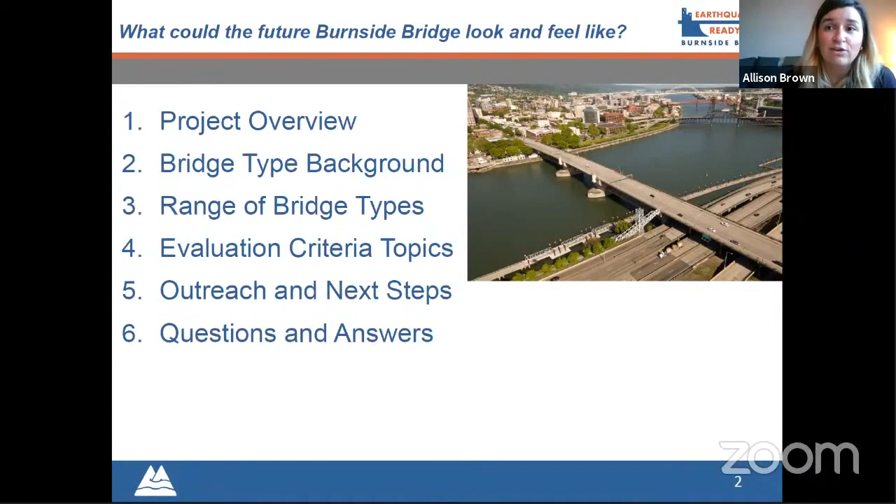We'll also let you know what additional outreach is happening and some of the next steps and how you can continue to stay involved and informed. Then we'll get into your questions and answers. This presentation should take about 30 minutes, and we're going to save the second half of the meeting for your questions and answers. But I think we can go to the next slide.

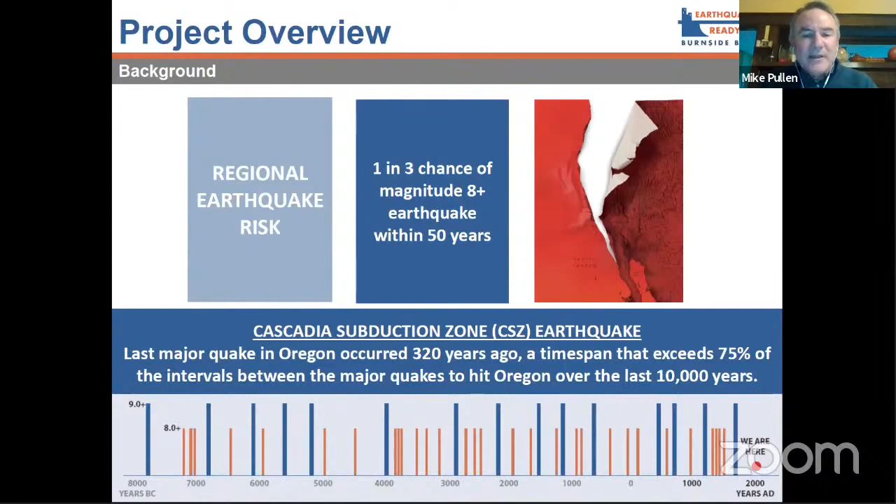So why are we doing this project? Engineers tell us that if the big one were to happen today, none of our downtown bridges in Portland would be usable for at least a month. And in the case of some of the bridges, we'd have to completely rebuild them. So that would really devastate the community in the immediate time after the earthquake and really harm its ability to recover. So the purpose of the project is to make sure we have at least one bridge we can count on the day of the big earthquake. And then after that day, we want to have at least one bridge that we can use to recover as a region.

Here I oftentimes mention the example of New Orleans. After Hurricane Katrina, they lost about a third of their population, about a third of their jobs. And I think 15 or 20 years later, they're still underneath the population when Katrina struck. So we want to have infrastructure that can help our region recover and hold our economy and our jobs here.

Then the last point on the slide is, if we're lucky and maybe the earthquake doesn't happen in the next 100 years, well, that doesn't change the fact that the Burnside Bridge today is 94 years old. We're not going to get another 100 years out of that bridge. Multnomah County is interested in making sure that whenever the earthquake happens, we've got a bridge that will serve us another 100 years. And we want a bridge that works well for all modes. The current bridge doesn't work well for all modes. Next slide, please.

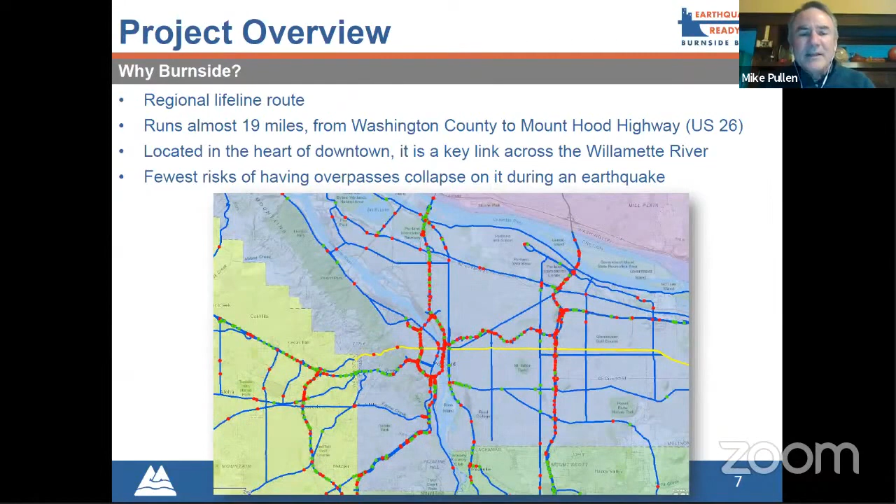Meanwhile, we want to make sure downtown and the east side are connected, so we've chosen Burnside. Next slide, please. So we're in a long project.

I was talking to a journalist today about how long these projects take, and it is true. There's a lot of requirements. When you build something new, you have to go through additional planning and federal review of your plans.

So we are marching from left to right across this slide of our schedule. We've done a feasibility study that looked at every single option you could think of, even tunnels. From that, we ended up with 4 of the best options to do a deeper level of study on. We're in that phase. We've identified a preferred alternative.

We're going to show that to you tonight if you're not familiar with it. And by the end of this year, the end of 2021, we expect to have our plan approved, including the preferred alternative. Then next year, we can begin the work to design it and acquire right of way. That's about a 2.5-year process. So we could be about 3.5 years away from constructing the bridge.

Fortunately, we have the money to get through all this design phase, and some of the money for construction, and we're looking for the additional construction funds from state and federal sources.

One thing before we leave this slide is that there have been some changes in the federal approval process, and one of those changes requires us to actually identify the bridge structure type this year. In the past, you might have been able to wait until after you got your plan approved, but there's new requirements, and that's why we're talking today about what structure type. So we hope to make that decision by July of this year.

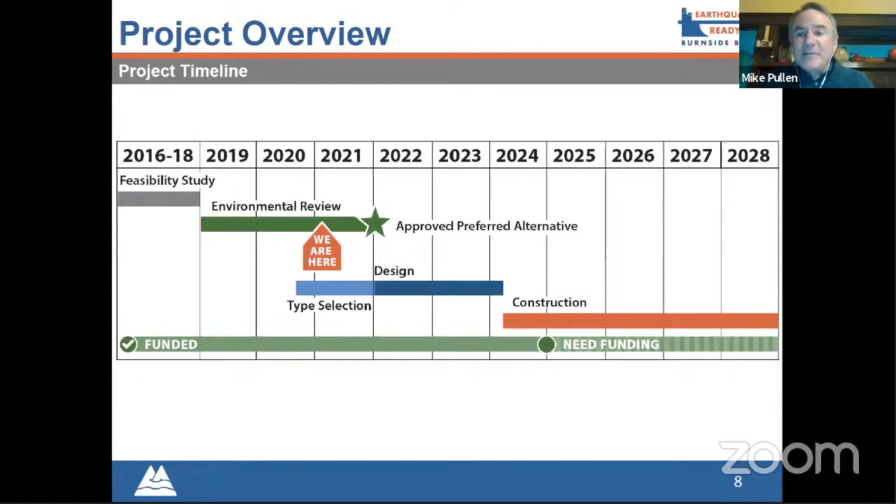Next slide, please. So this slide kind of zooms in on the immediate milestones for us. When it comes to the bridge type, tonight we're going to share with you the ones that we've identified as a small range that kind of are feasible and make sense for being considered in more depth. And we'll be coming out with a recommendation of the preferred bridge type later this spring.

We have a community task force that gets deep into the details of these decisions and makes recommendations. So they're expected to make a recommendation, I think in May, and we'll go out to the public with that recommendation and then look to finalize it in July.

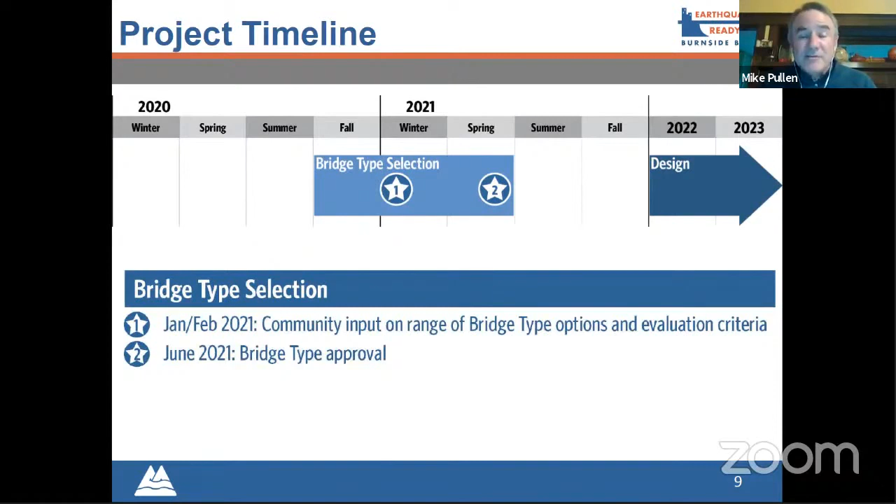As I mentioned, it says June on this slide, but I think it might stretch into July. Once that's approved by the federal government, we can start the design work next year. We hope to hire the design firm and even the construction firm by this fall.

So how much is it going to cost? That's a very important question. We're looking at a range because we don't know which structure type yet. That's still to be determined, but it's in the $800 to $950 million range. We do forecast building in the inflation, which is one reason the number is so high. You look out to the year of construction and have to kind of look into a crystal ball—what will steel cost, what will labor rates be? So that's one reason we don't have a single number. We don't know the structure type, and we're still a long way from getting the bridge designed and built, but that gives you a sense of the range. It's a big dollar project.

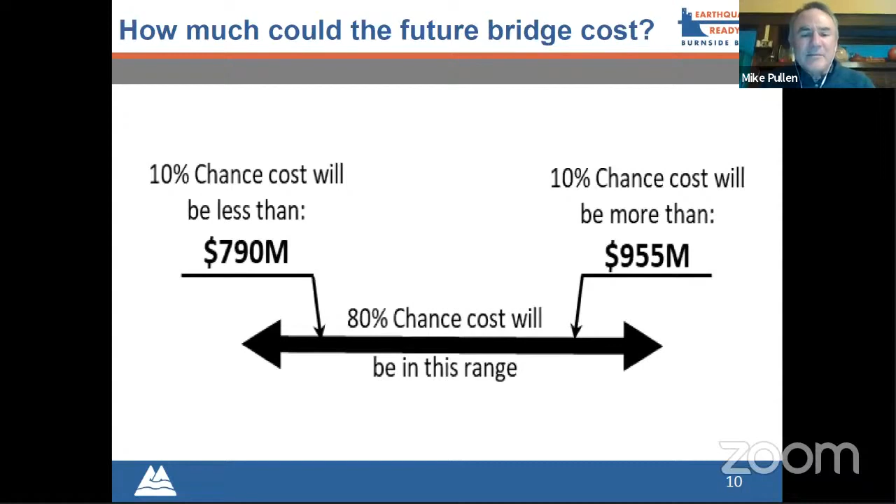Now we'll give you some visuals about the bridge structure type. I've got a couple slides before I hand it over to Steve.

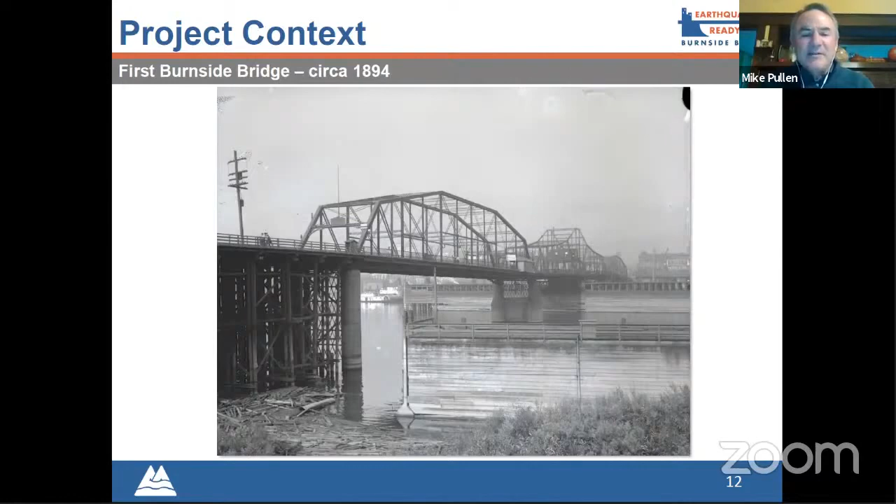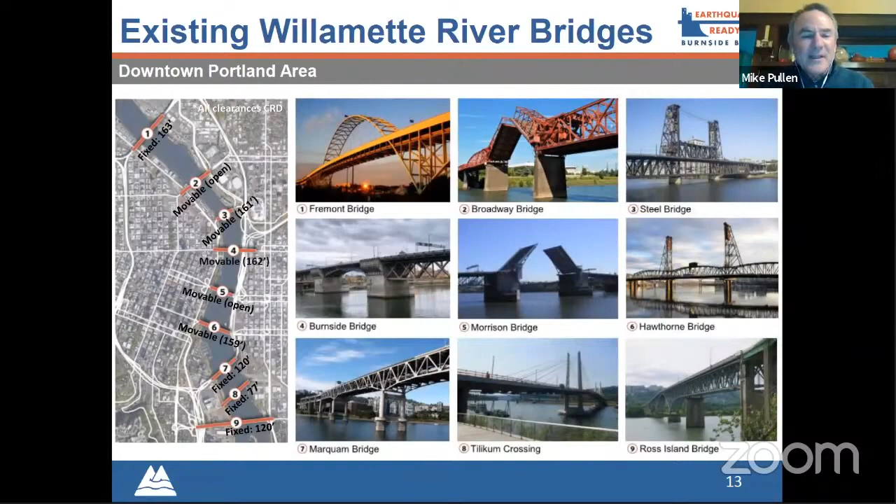So here are the structure types. It feels like the Academy Awards, our candidates. We've got a tied arch, which would be a little like the Fremont Bridge; cable supported, a little like the Tilikum Crossing, the new TriMet bridge; and a truss bridge, like some of our oldest bridges, such as the Hawthorne or the Steel.

On the movable span, we're really down to just two choices. Bascule is the type of drawbridge the Burnside currently has—the Morrison is another one that's a bascule. In this kind of bridge, the leaves rotate up, giving unlimited vertical clearance in the center. The other option is a vertical lift, similar to the Hawthorne and Steel bridges. With this one, you have a finite amount of vertical clearance when it goes up—it can only go as high as the towers that hold it up. That's not too big a problem, because just on either side of Burnside you have the Steel Bridge, which has finite vertical clearance, and the Hawthorne Bridge, a couple bridges to the south, also with a finite amount of clearance. So this is a very logical, feasible type of structure we could build for Burnside.

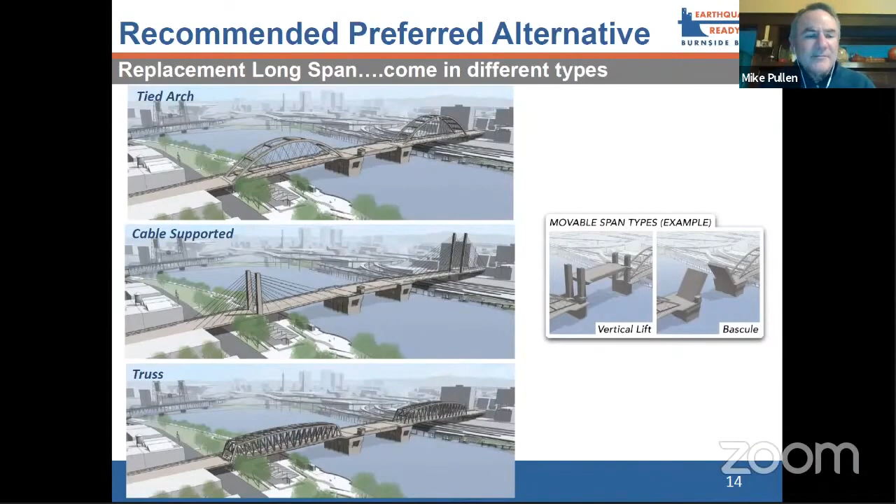I think this might be my last slide before I hand it over to Steve.

This is about the parts of the bridge we're going to decide this year versus the parts we'll decide during design. You see some symbols there for TS, that's type selection, and then there's other things that are FD, that's final design. This is partly to remind folks who want to get into designing smaller details like lighting or overlooks where someone walking across can step out of the sidewalk and look down at the river - those are things we'll decide in the next couple of years, but not this year. This year we're really deciding on the structure type, such as whether it will be an arch, a truss, or a cable stay, what type of movable span we'll have, and the general locations for the columns that will go into the river and on land. So that's the kind of decisions we're making this year.

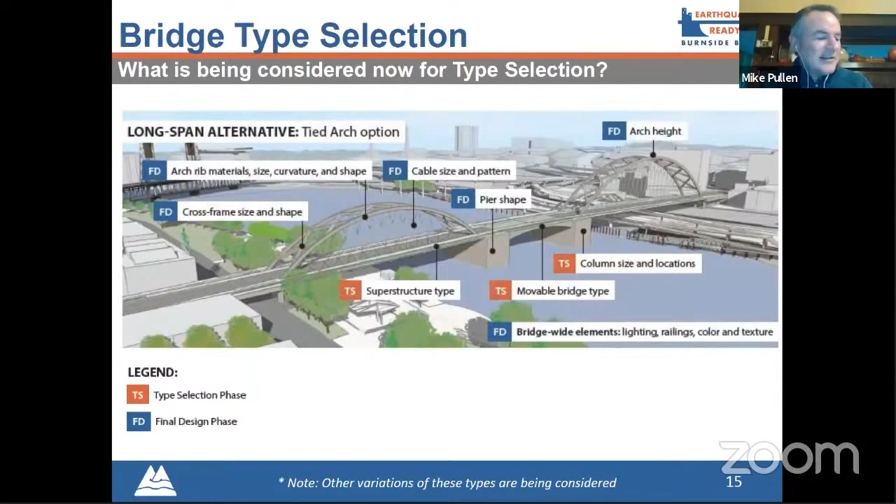Mike - and one of the key things about that last slide with FD and TS is that type selection is really about basic form. So a lot of the graphics I get to present are representations of basic form. Even cool ideas about the inclination of arches, the style of cable stay, or the form of a truss and how it works together - a lot of those things would be punted into final design.

As we're looking at this and thinking about this nod to the future, there's really this key theme of the bridge - it's 3 bridges in one. There are some really unique features of each part of the bridge.

The left side, as you can see with downtown Portland on the left-hand side, is the west approach. It's about 425 feet long, and it's really the span that goes from the in-water pier out there to over or around Naito Parkway.

Then you have that center movable span that's about 450 feet long - comparable length, very similar to the west approach. And again, like Mike described, it could be a bascule, could be a lift, a couple different varieties of movable bridge.

But on the east side, you have a much longer span - that 650 foot long span. It has to go over more things, not just the river or the East Bank Esplanade, but over the freeway and the Union Pacific Railroad lines, and then land somewhere before 2nd Avenue. So it's a really different type of opportunity.

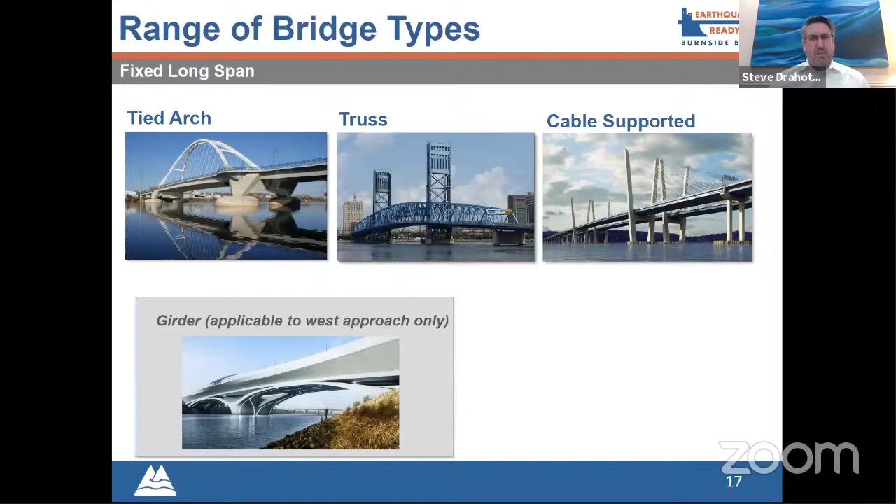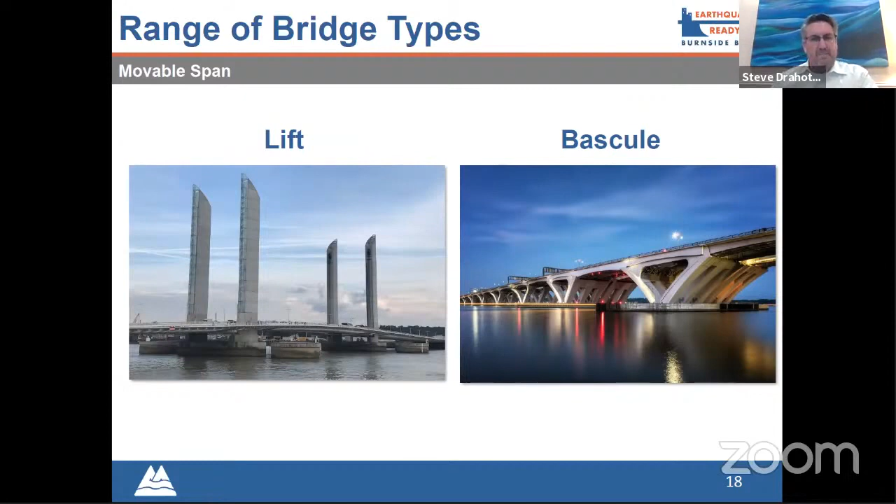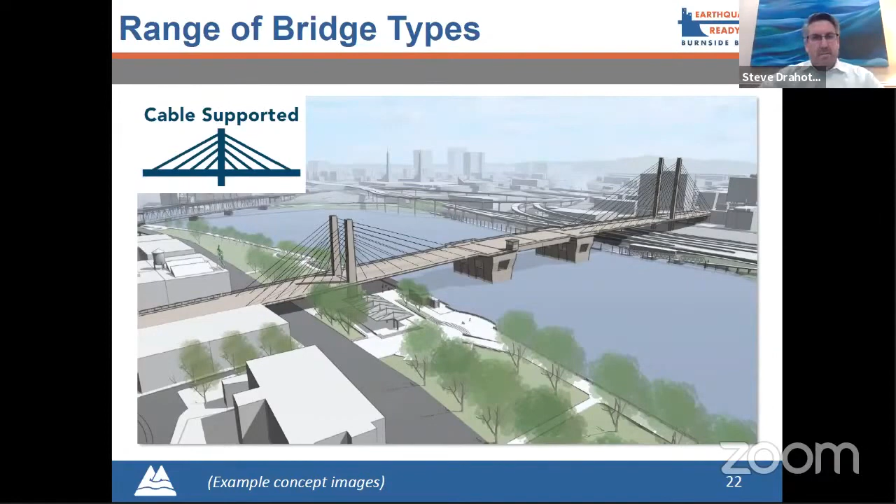Allison, is there a question or should I keep going? There is a question that I think will be wonderfully related to these slides, but I'm going to ask that you keep going. Okay. We'll hold questions to the end. You were breaking up a little bit on my end, so if anything's breaking up, we're going to try and just recap. But I think folks have got the gist of what Steve was saying. So back over to you.

So then we looked at the truss, and the hallmark of the truss, similar to what's out there at many locations, is its diagonal members on the outsides and its cross bracing on the top. It has fairly thick members compared to some of the cable supported options or even the tied arch. But the truss is a very viable option. And if we go to the next slide, you can see how you can frame in the trusses on either side to the different bascule options.

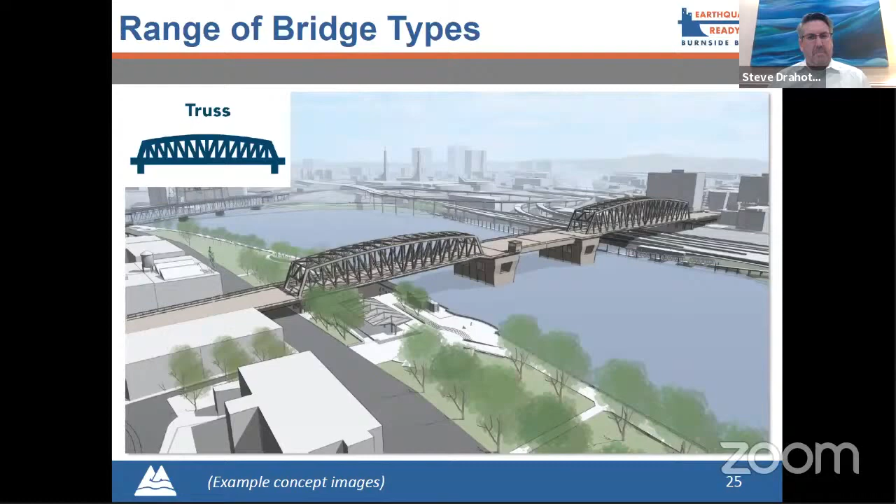So on the next slide, there we go. We have that same helicopter view with the different sizes of truss. Again, because it's longer on the east side, it's taller compared to the west side, with or without that girder option. Again, with that trade-off between having more views above the deck versus having limited vertical clearance below the bridge where Waterfront Park is. All right, next slide.

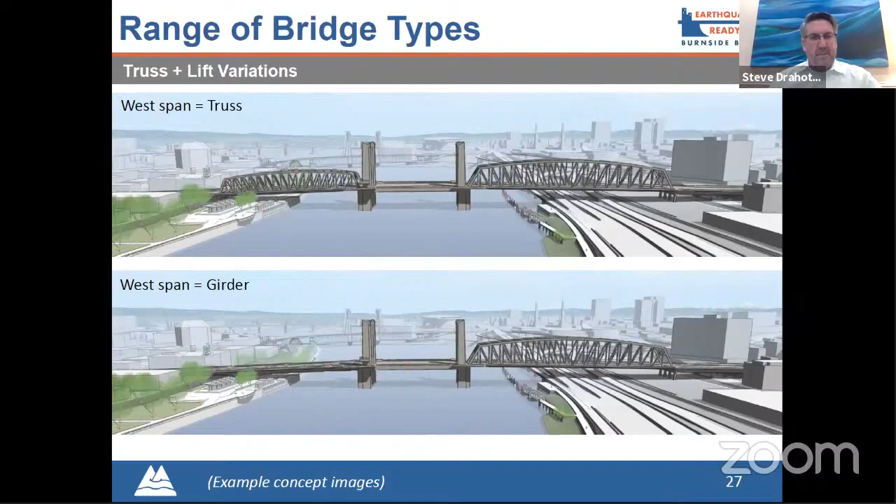And in this slide, it's really that same idea, but with these vertical lift towers in the middle. Next slide, please. So when you compare the truss and the tied arch, it really comes down to a couple different basic differences. Number one, the truss is relatively shorter than the tied arch, and you can see that through the numbers, whether it's 60 feet or 95 feet compared to 85 or 120. Basically, the tied arch gets a little taller.

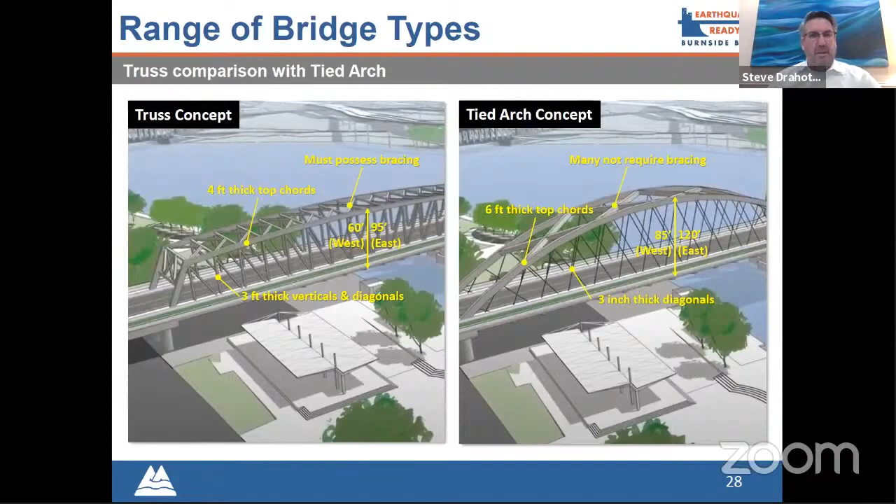But what it has working for it, the tied arch has only 3-inch diagonal members, this network arch, versus these 3-foot thick verticals and diagonals on the truss itself. And on the top, subject to how final design goes, there's a chance that you can actually eliminate the bracing at the top of a tied arch through thicker rib members, those arched members. But on truss, it's part and parcel to what a truss is. You need that closure. So they have the same basic vertical clearance, but there's a difference in the openness, the feel of it, depending on what the options are. All right, next slide, please.

All right, so now what we've done is we've taken our camera and we've placed you in the middle of Waterfront Park looking south. So you can see on the right-hand side, the Portland, Oregon sign. That's where the U of O building is, adjacent to the bridge. And what you're seeing on this screen is the existing bridge with its series of columns and supports throughout Waterfront Park. And so as we look at these different options, and we'll start with the next slide, please.

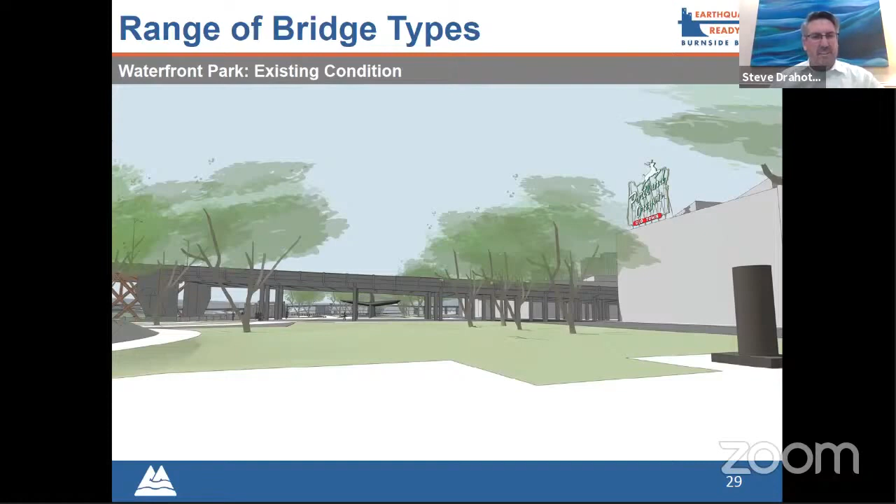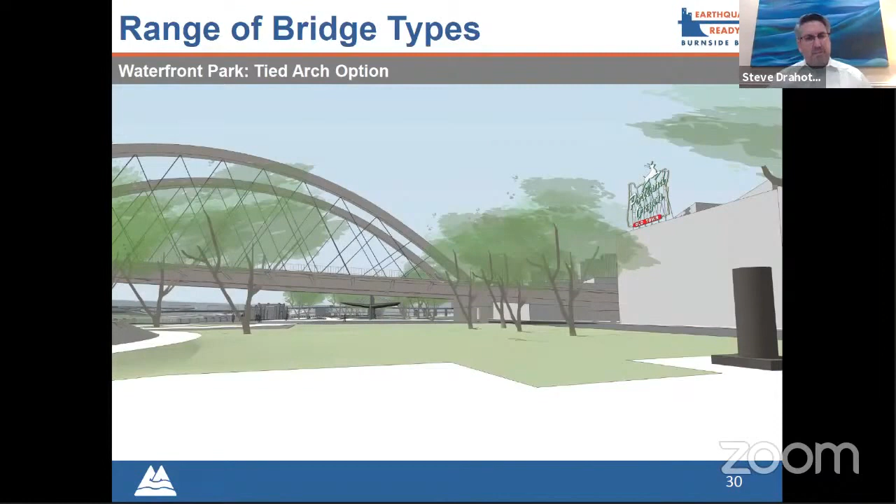We'll start with this tied arch. And in this option, the tied arch spans all the way from that pier in the river over to a support, in this case, near Naito Parkway. And so you can see by eliminating all of those columns in Waterfront Park, you really open up the space. In fact, you gain a couple of feet of vertical clearance underneath the bridge as well, just because you've moved the structural portion above the deck. And so the compromise of having some superstructure above the deck means that there's more space below. All right, next slide, please.

So then we get to the girder option. And the hallmark of the girder option is the open views above. But again, that trade-off is it has to get thick as it goes from the deck level down to where the support is. And this is where the vertical clearance gets reduced. A lot of people really enjoy the views. They enjoy when they walk across the bridge, seeing the Portland, Oregon sign or having an open view into downtown. And so this option provides that kind of a benefit. Again, with that trade-off of what does it mean to the park space below. All right, next slide, please.

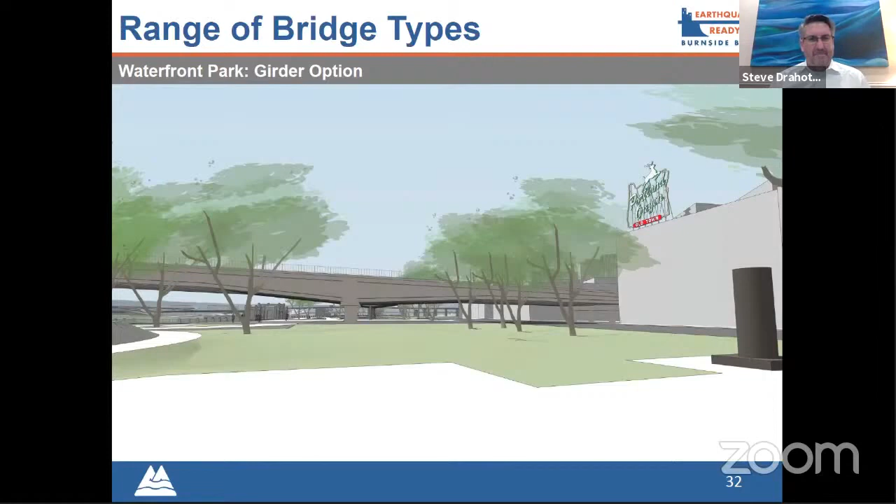And so what we've done is created a slide that basically has all of these options all at once to get an easier understanding of the different trade-offs and opportunities that come with the different bridge types. And so some of these, like I was saying before, have more vertical clearance, this 25-foot vertical clearance versus the 23. Some of them have less, the girder option. And so each one of these is being assessed as part of our type selection process, this basic form to understand what bridge type should ultimately be selected.

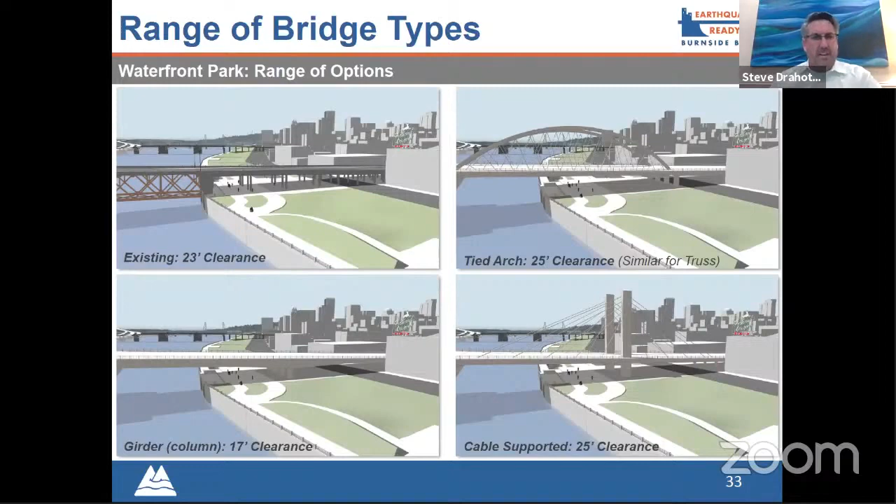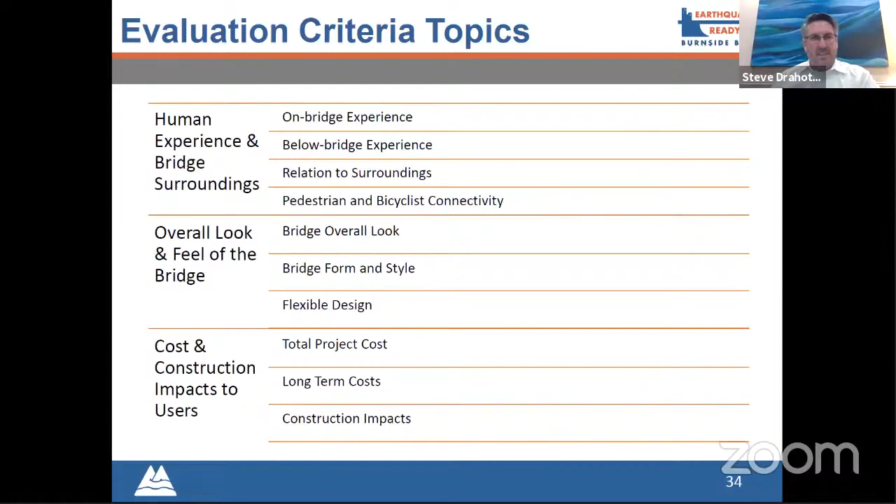And so the community task force is being asked to assess all of these different options against these types of criteria, and then ultimately make a recommendation on which bridge type should go forward into final design. And so with that, I will hand it back over to Mike.

Thank you, Steve. So we are hearing a lot from the community about this decision. I think this is a part of a project that people like to kind of sink their teeth into because it's really about appearance, and a lot of people have opinions about what it should look like. So that's why we're getting together with you all tonight. We've been doing a lot of road shows, we call them, where we go out and talk to different groups. We have an online open house that we recommend. If you haven't been to it, it's up till February 21, and it has information, some of which you've already seen, but even some more things, like a video where you can see what these different bridge types might look like in the existing environment of the Burnside Bridge.

So we've had, I think, over 1,000 people look at the video. We're getting close to that with the comments people have made, and also working a lot with people who have connections to the non-English speaking communities in Portland. It's going well, and it's really a big push the next couple weeks before we wrap that up and then take all that input back to our community task force and let them know what we heard from the public.

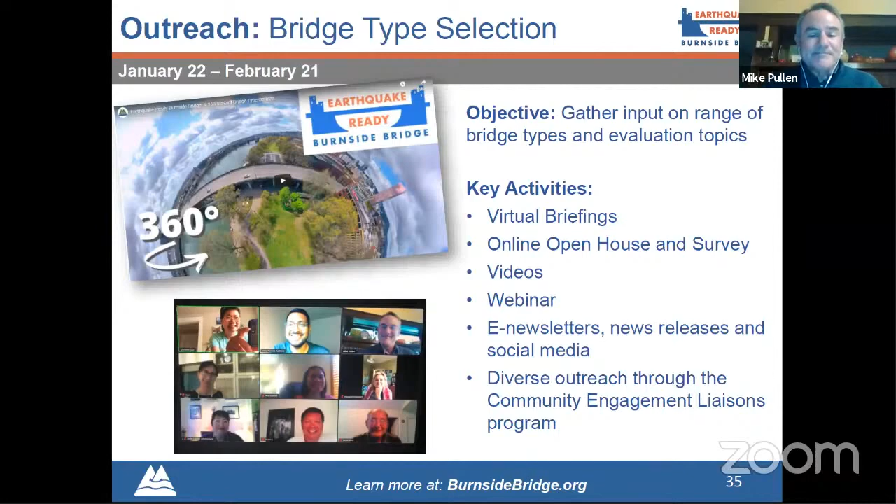Next slide, please. So coming up on that, we have our current outreach in January and February. Then we'll go back to our community task force in March, and also update our policy group, which is a group of elected leaders from around the region, about the range of bridge types and the evaluation criteria that Steve just shared with you on that slide. Then the community task force should be making a recommendation here in the spring, and then we'll come out with that recommendation to the public. And hopefully we'll be deciding this July on what type of bridge we're going to design and build. And it's getting more real with each month as these decisions get locked in.

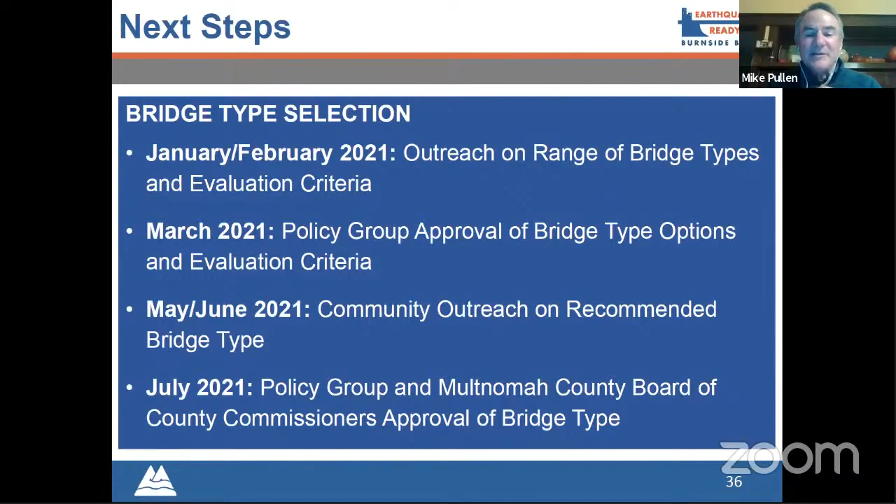So I do see we have a couple questions too. I don't know if there's another slide before we go to questions. Next up, yeah, it's time for questions. So Laura, I'm going to ask that we keep the slides up just for a second, because this first question from Sean, I think, will be helpful if we can go back to slide 20 or somewhere thereabout. Steve, this is one for you, so get ready.

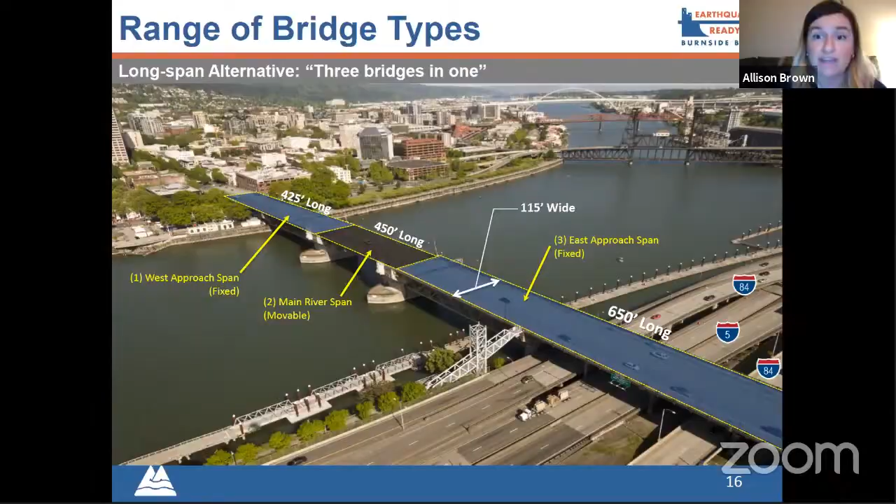We have a question from Alex, which I think might be a Mike question. I'm going to read it out loud because there are a couple points here I appreciate Alex putting into this question. Given that climate change is an existential threat, gasoline-powered cars are the most persistent and difficult to avoid cause of global warming, and climate change is an existential threat to our society and way of life, I'm wondering what the plans are to eliminate cars from the Burnside Bridge.

Mike, thoughts on ways that we could get rid of cars on the bridge, or if that's being taken into consideration? Well, Alex, thank you for raising that question. It is an existential threat.

The Burnside Bridge, our use of it as people changes over the years, and it partly reflects things like climate change, like you're talking about. When I joined the county, I think it had 6 lanes for traffic, then it went down to 5, and now just about a year ago, it went down to 4. So now there is a bus-only lane in the eastbound lane, and it's actually the city of Portland that makes a lot of those decisions.

This is sort of a bureaucratic answer to your question, but the city of Portland is the road authority, and ultimately they make these decisions about how the bridge traffic lanes are allocated, and TriMet plays a big part in that. Multnomah County has a lot of experience building bridges and maintaining them, and they're kind of a specialized type of thing. We've been in that business basically for over 100 years.

And we kind of follow what the city wants to do with allocating the traffic lanes. I think watching trends, we've seen that more space is being allocated to bicyclists and pedestrians. We propose greatly expanding the amount of space on the new bridge for bicyclists and pedestrians. We don't add any new traffic lanes, and we're actually factoring in the fact that we could see another bus-only lane in the near future. So it's probably more of a gradual thing as we see single occupancy vehicles decline in number. But that's sort of how I see it happening, more gradually.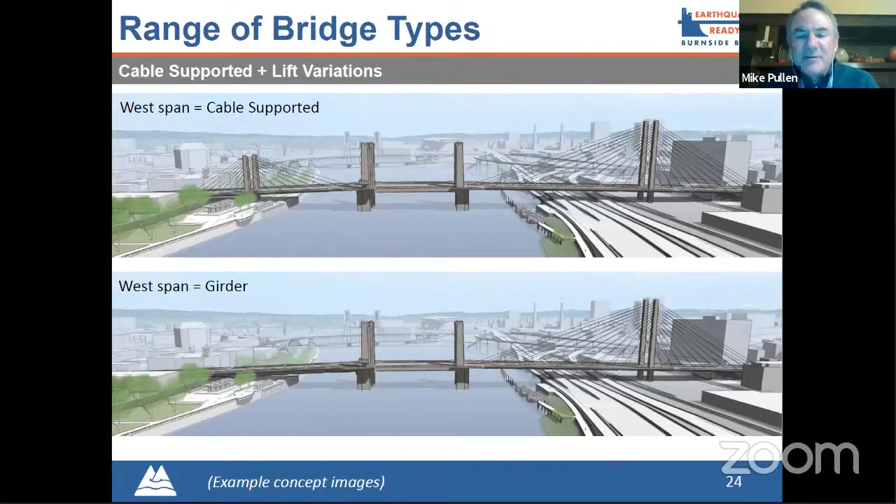It kind of gets into what Steve was addressing when he was answering a question about why don't you put some intermediary span on the east side, more between where the freeway lanes are. It's because that's sitting on liquefiable soil. I guess the reason for that is there's a bend in the river at this point, and on the outside of that bend is the east side. The river's just been dumping sediment there as it flows through for thousands of years, and on the inside of the curve there's a lot less.

Yes, okay. Go ahead, Steve. Yeah, so let's go back to bridge engineering fundamentals. One is: the longer the bridge is, the deeper or taller the bridge deck, or in this case towers, have to be. So to Mike's point, because this span length, going back to the 650 feet, is longer, the tower needs to be much taller on the east side. The west side, the span length at 200 feet shorter, you don't need the same tower height. So it almost looks like a baby cable stay.

Now, how do you make the two the same? Well, you'd have to bring up the west side and reduce the east side. But the consequence is the deck on the east side would have to get a lot thicker to carry some of that load, and on the west side you're basically building in more structure than is really needed from an economic standpoint.

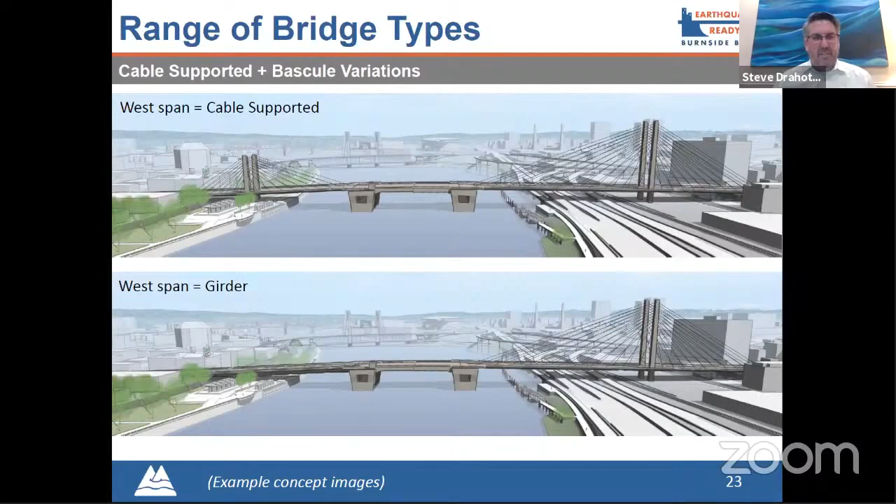So can you artificially increase the height on the west side? You could, but now you have a different inclination angle and your eye would notice that. The height might be the same, but the way the angle comes down, you'd see it, and it actually looks awkward. So in the bridge engineering world, we know it's better to have a uniform shape and aspect ratio—height to length and those angles coming in—than it is to have the same height.

So there are a couple of different variables that could still be worked out in final design about where the pier is on the far east side. Maybe it can be scooted in a little bit to make these ratios a little closer, but it's part and parcel of the fact that you have different span lengths on both sides.

Steve, there's a follow-up question that just came through: if you eliminated cars and made the bridge pedestrian and bicycle only, would it be possible to use less material and make both sides look the same?

Well, you would make the bridge narrower. Anytime you reduce the width, you make it narrower and therefore you use less materials. That is a fact. The same principle exists though on where the supports are, regardless of what is being loaded. It's a function of length, gravity, and length.